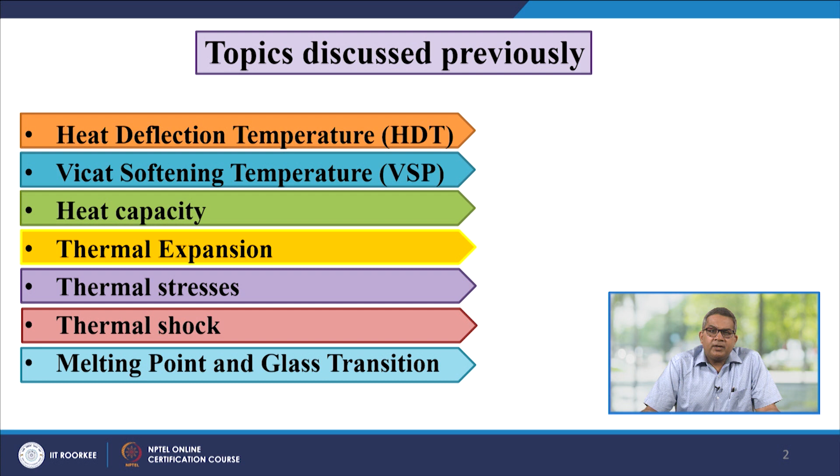In this segment we are going to discuss the melting temperature and the glass transition temperature, which is very important in polymeric systems. We will also discuss thermal conductivity, especially in polymers and composites. Apart from this, we will discuss heat transfer and heat conduction, how this conduction takes place in polymeric systems, and we will deal with several heat transfer examples pertaining to polymers.

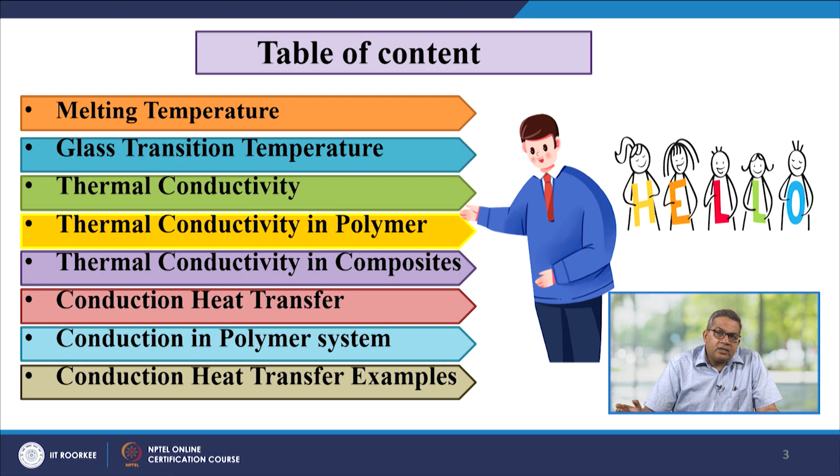Now let us talk about amorphous and crystalline polymers. Polymers are usually made up of long chain molecules, which may be amorphous or crystalline. The structure of a polymer is defined in terms of crystallinity.

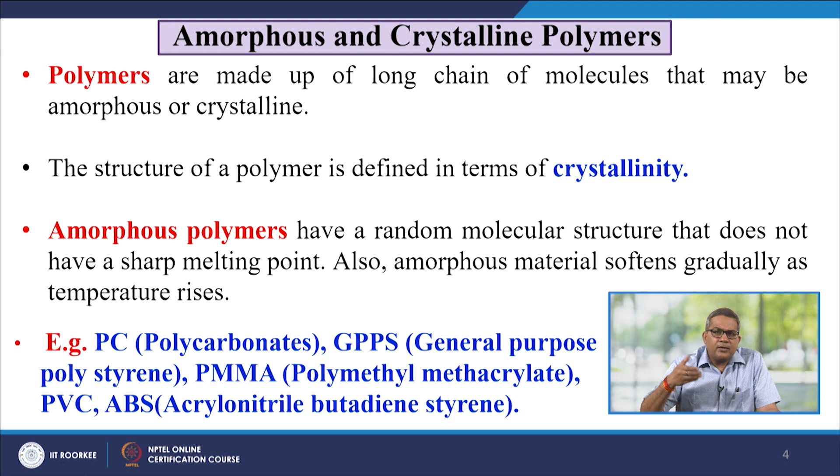Amorphous polymers have a random molecular structure that does not have a sharp melting point. Also, amorphous materials soften gradually as the temperature rises. For example, polycarbonate, general purpose polystyrene, polymethyl methacrylate, and acrylonitrile butadiene styrene are the best examples of these polymers.

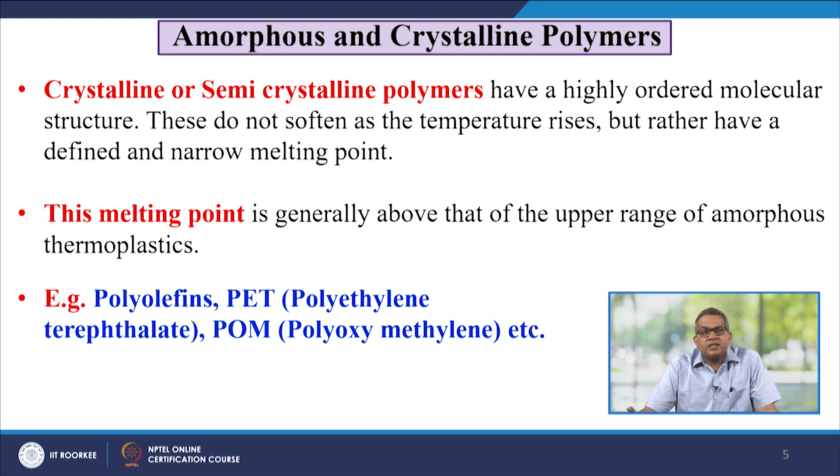Now, crystalline or semi-crystalline polymers have a highly ordered molecular structure. These do not soften as the temperature rises, but rather have a defined and narrow melting point, which is generally above the upper range of amorphous thermoplastics. For example, polyolefins, polyethylene terephthalate, and polyoxymethylene are examples of crystalline and semi-crystalline polymers.

Completely amorphous polymers possess only the glass transition temperature, completely crystalline polymers possess only the crystalline melting point, and semi-crystalline polymers possess both the glass transition temperature and the melting temperature.

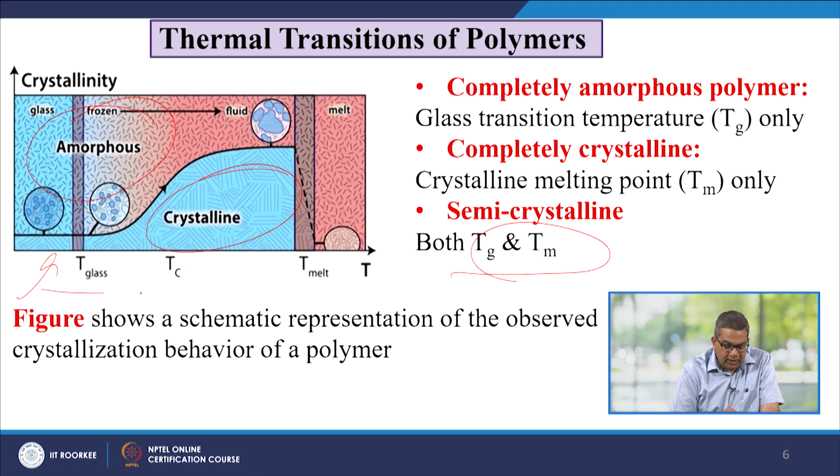In this figure you see the schematic representation of the observed crystallization behavior of a polymer. Here you see the amorphous range and the crystalline range, and if you change the temperature, you will observe this type of behavior.

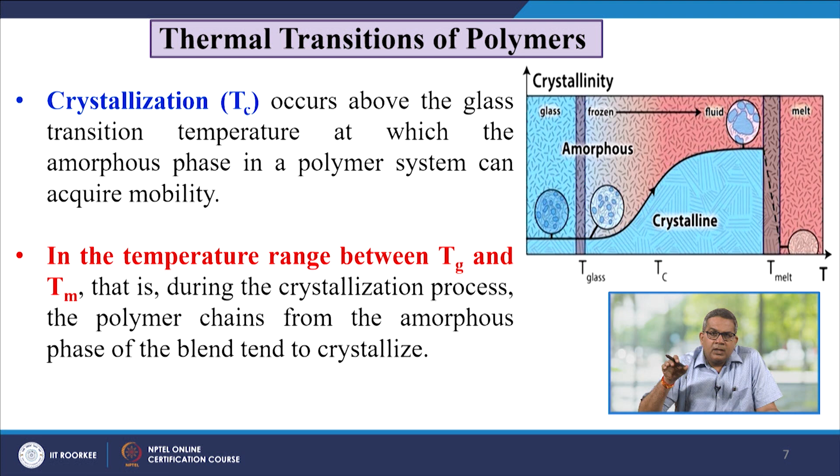Now, crystallization TC occurs above the glass transition temperature, at which the amorphous phase in the polymer system can acquire mobility. In the temperature range between the glass transition temperature and the melting temperature, that is during the crystallization process, the polymer chains from the amorphous phase of the blend tend to crystallize.

Let us talk about the glass transition temperature, since in the previous slides we discussed this TG. When an amorphous polymer is heated, the temperature at which the polymer structure turns to a viscous liquid or rubbery state is called the glass transition temperature, TG. This is because the polymeric chains try to unentangle themselves and align in a particular flow behavior, which occurs at the glass transition temperature.

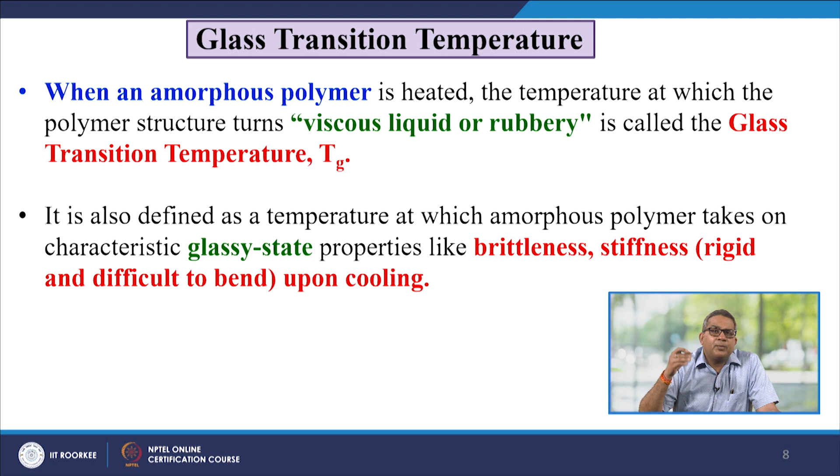It is also defined as the temperature at which the amorphous polymer takes on characteristic glassy state properties like brittleness, stiffness, rigidity, and difficulty to bend, upon cooling. It is named 'glass' because glass is a supercooled liquid, and this resembles the amorphous polymeric structure.

This temperature is usually measured in degrees Celsius. It depends on the chemical structure of the polymer and the chain structure, and can therefore be used to identify polymers; it is directly related to the molecular weight distribution. So the value of the glass transition depends on the mobility of the polymeric chain.

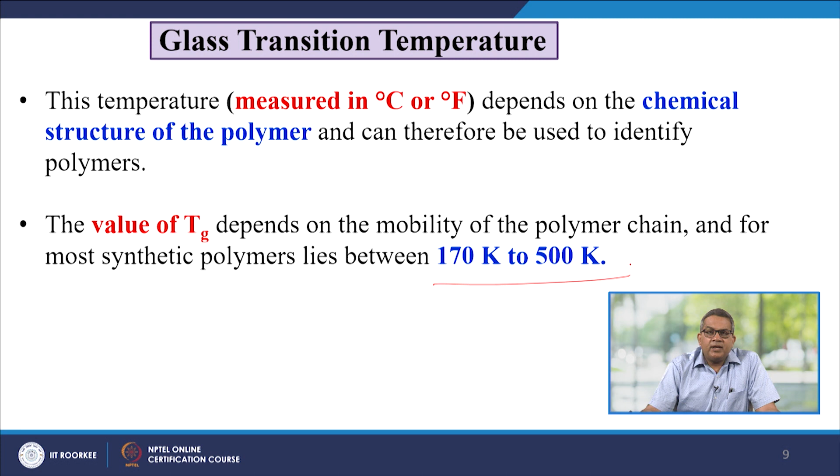As I discussed, when you raise the temperature, the chains try to unentangle, and if you lower the temperature, they try to entangle themselves. For most synthetic polymers, this lies between 170 Kelvin to 500 Kelvin.

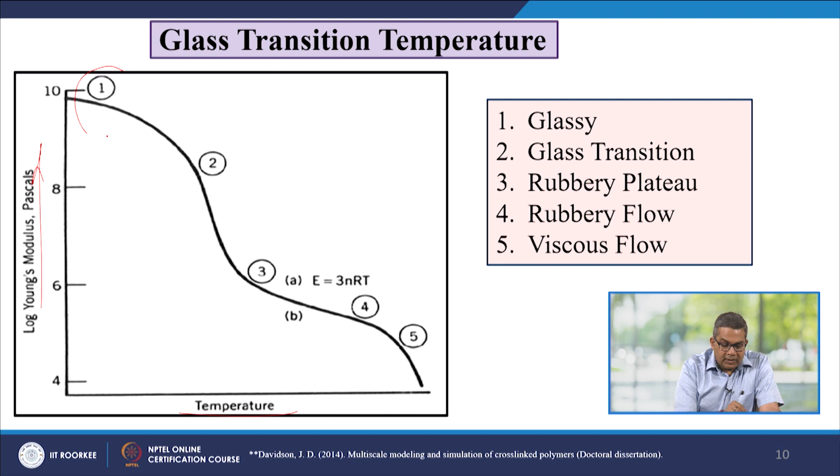Now here you see the Young's modulus versus temperature plot. Here you see the glass transition temperature variation for different stages: the glass transition temperature, and over the period of raising the temperature, the rubbery state, rubbery flow, and then the viscous flow. This is because if you raise the temperature, all the chains try to align themselves in a particular array and then try to flow.

So these are the different stages observed if you raise the temperature from any stipulated point to a different point.

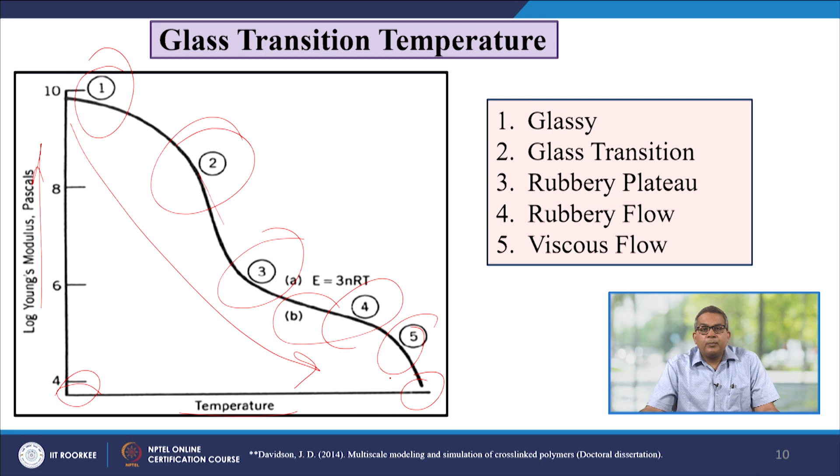The transition from glass to the rubber-like state is an important feature of polymeric behavior, as there is a dramatic change in physical properties such as hardness and elasticity. Some polymers are used below their glass transition temperature, like polystyrene and PMMA, which are hard and brittle, and their glass transition temperature is higher than room temperature.

If you raise the temperature, initially this is the glassy state, which is a subcooled liquid type of state. Then at the glass transition temperature they align in the rubbery state, and then they try to go for the viscous flow.

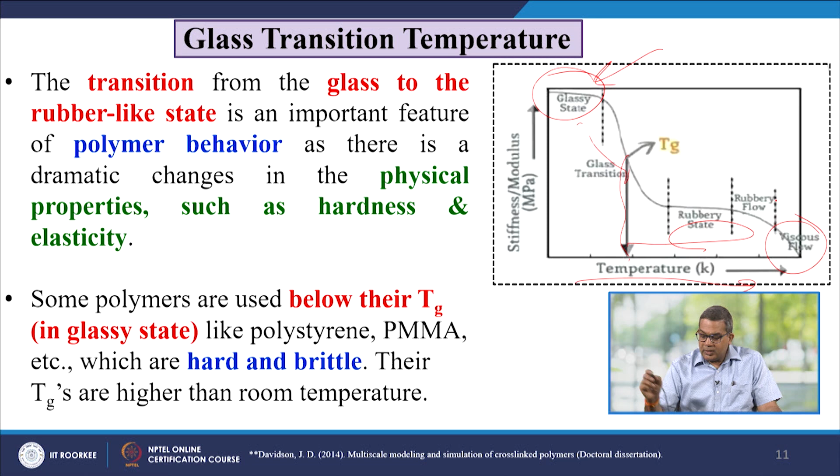Some polymers are used above their glass transition temperature, like rubber elastomers, polyisoprene, polyisobutylene, etc., which are soft and flexible in nature and their Tg is less than room temperature. So this can be used as a soft material for various purposes, like different types of artificial grasses, carpets, and all these things use this particular behavior.

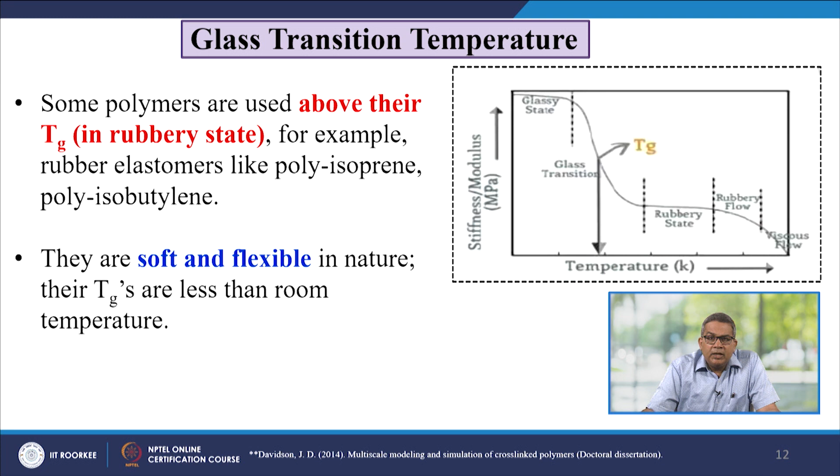At the glass transition temperature, changes in hardness, volume, and percent elongation to break of the solid are mainly seen, and glass transition is an important tool to modify the physical properties of the polymer molecules.

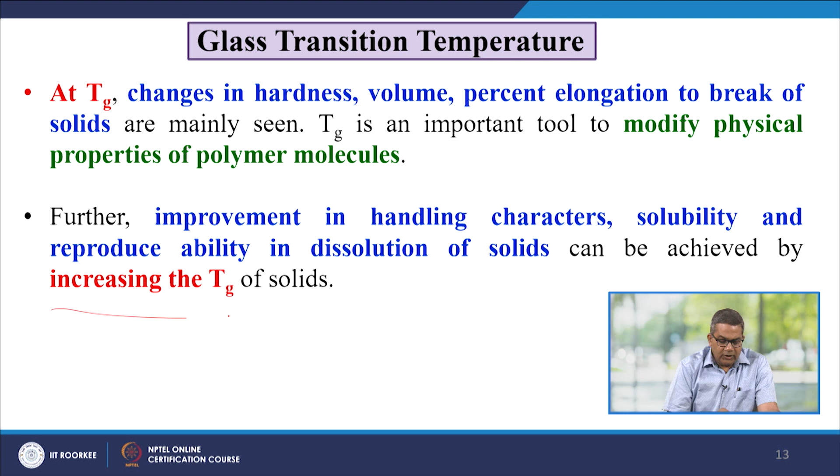Further improvement in handling characteristics, solubility, and reproducibility in the dissolution of the solid can be achieved with an increase in the glass transition of the solids.

Sometimes hard plastics like polystyrene and polymethyl methacrylate are used below their glass transition temperature when they are in the glassy state. Their glass transition temperature values are above room temperature, around 100 degrees Celsius.

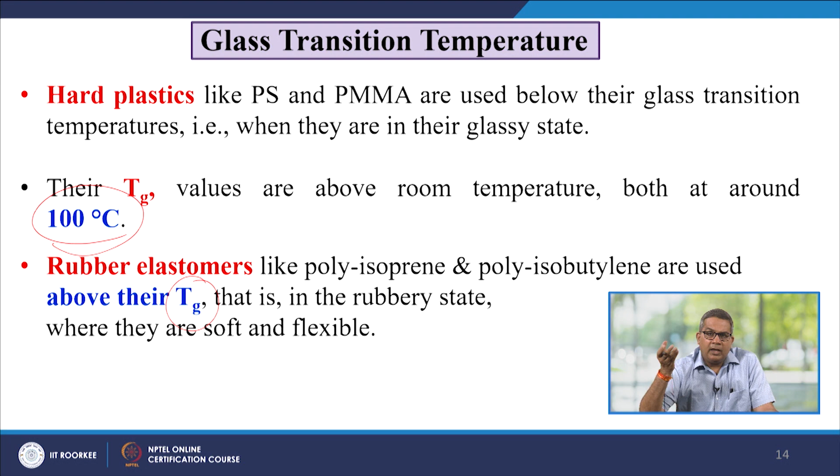Rubbery elastomers like polyisoprene and polyisobutylene are used above their glass transition temperature, as their rubbery state is required, or the soft and flexible character is required for those polymers.

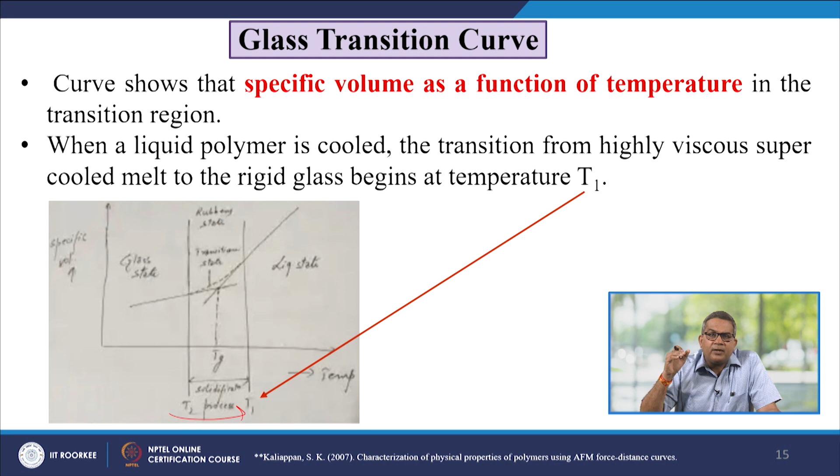Here you see the curve of specific volume versus temperature in the transition region. When a liquid polymer is cooled, the transition from a highly viscous supercooled melt to the rigid glass begins at temperature T1. This is T2, where the solidification process is terminated.

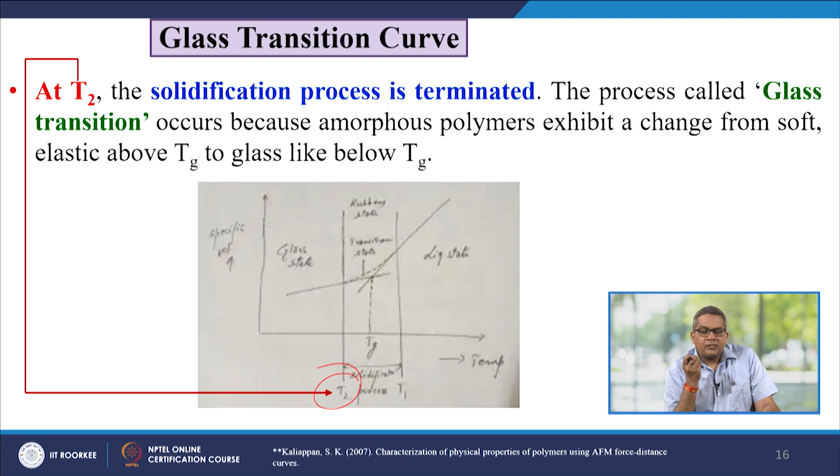This process is called glass transition, and it occurs because the amorphous polymer exhibits a change from soft elastic above the glass transition to glass-like below the glass transition temperature. So the motion of all the polymeric chains starts to cease.

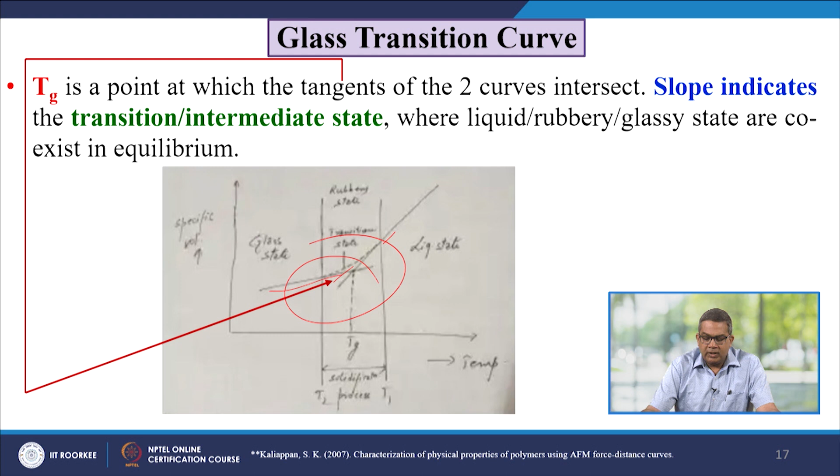The glass transition temperature, or Tg, is the point at which the tangents of the two curves intersect, and the slope indicates the transition or intermediate state where the liquid, rubbery, and glassy states coexist in equilibrium.

How do we measure the glass transition temperature? By observing the variation of some thermodynamic properties with temperature, like specific volume. If we plot specific volume versus temperature, the slope of the curve increases above the glass transition temperature.

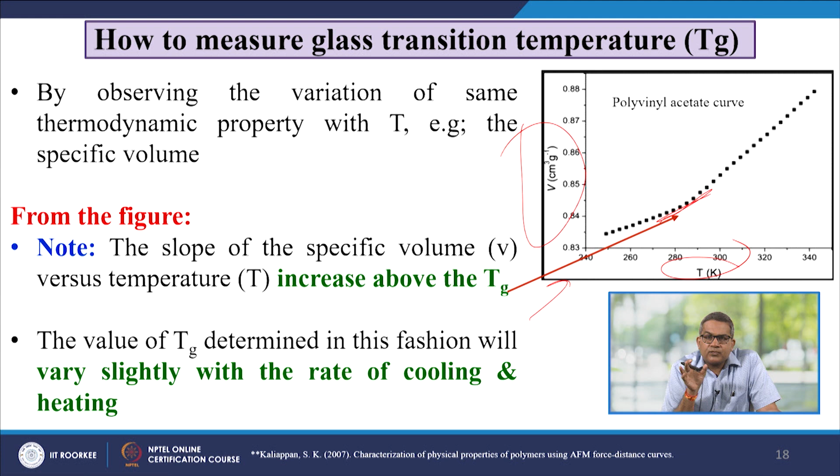The value of Tg determined in this fashion will vary slightly with the rate of cooling and heating. This reflects the fact that long entangled polymer chains cannot respond instantaneously to changes in temperature and elasticity, because they are bulky in nature, and there is difficulty in making thermodynamic measurements on the polymer.

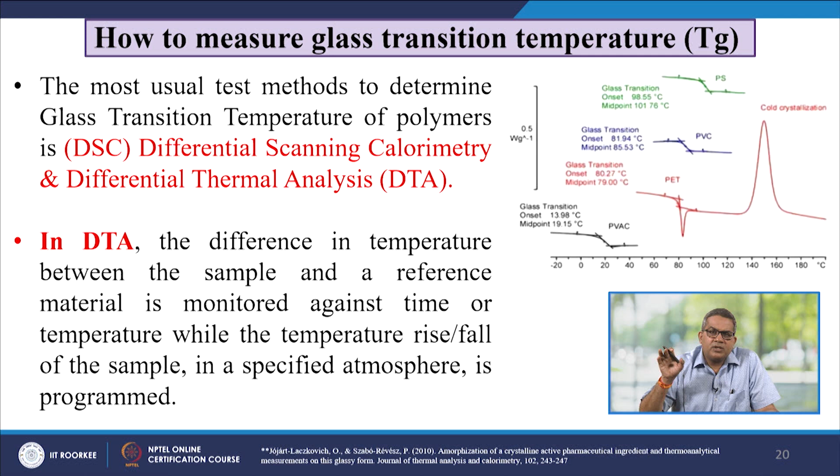The most usual test method to determine the glass transition temperature of a polymer is DSC, differential scanning calorimetry, and DTA, differential thermal analysis. In DTA, the difference in temperature between the sample and a reference material is monitored against time or temperature, while the temperature rise or fall of the sample in a specified atmosphere is programmed.

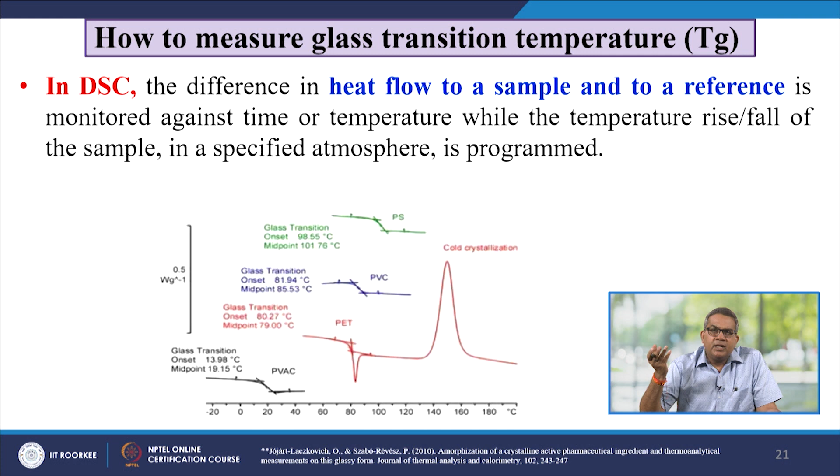In DSC, the difference in heat flow to a sample and to a reference is monitored against time or temperature, while the rise or fall of the temperature in a specified atmosphere is programmed.

Let us talk about the DSC, that is differential scanning calorimetry. DSC measures the heat flow into or from a sample as it is heated, cooled, or held under isothermal condition. There are various applications of DSC.

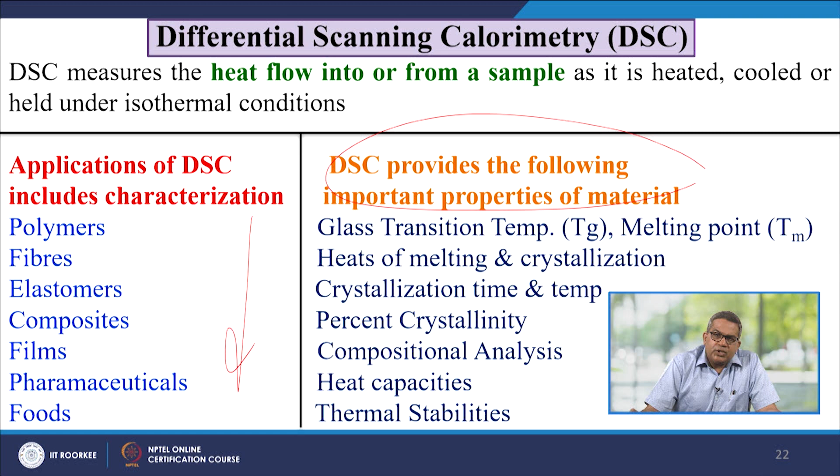This includes polymers, fibers, elastomers, composites, film, pharmaceuticals, food, etc. This DSC provides different important properties of the material like glass transition temperature, melting point, heats of melting and crystallization, crystallization time and temperature, percent crystallinity, compositional analysis, heat capacities, thermal stabilities, all those things.

Now there are various terminologies used in DSC. The first order transition: in the first order transition there is a transfer of heat between the system and surrounding, and the system undergoes an abrupt volume change, that is melting point and crystallization temperature. So here you see this is the temperature, the crystalline solid melt, and this is the crystalline first order.

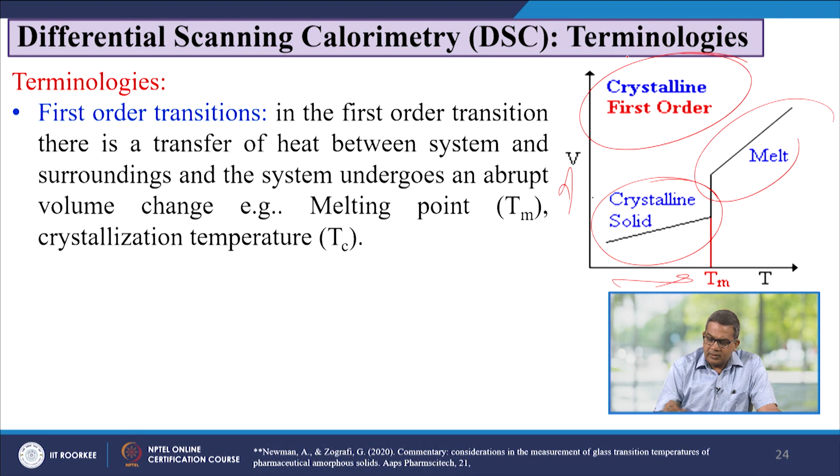Now, second order transition: in the second order transition there is no transfer of heat, but the heat capacity does change. The volume changes to accommodate the increased motion of the polymer chain, but it does not change discontinuously.

Now, when we plot the glass transition temperature, the Tg, in a graph, this provides the property of the amorphous region. Below glass transition temperature, disordered amorphous solid with immobile molecules, and above glass transition temperature, the disordered amorphous solid in which the portion of molecules can move back and forth.

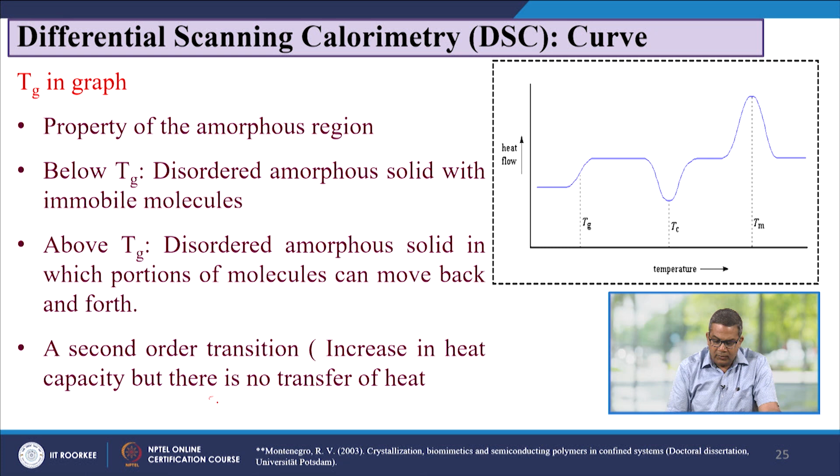The second order transition shows increase in heat capacity, but there is no transfer of heat. Above glass transition temperature, the polymers are in mobile condition. When they reach the right temperature, they gain enough energy to move into a very ordered arrangement, which we call the crystals. When polymer falls into this crystalline arrangement, they give off heat.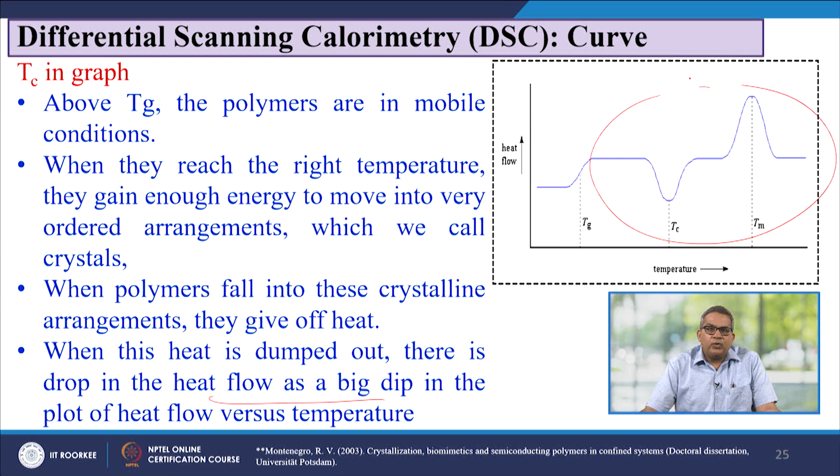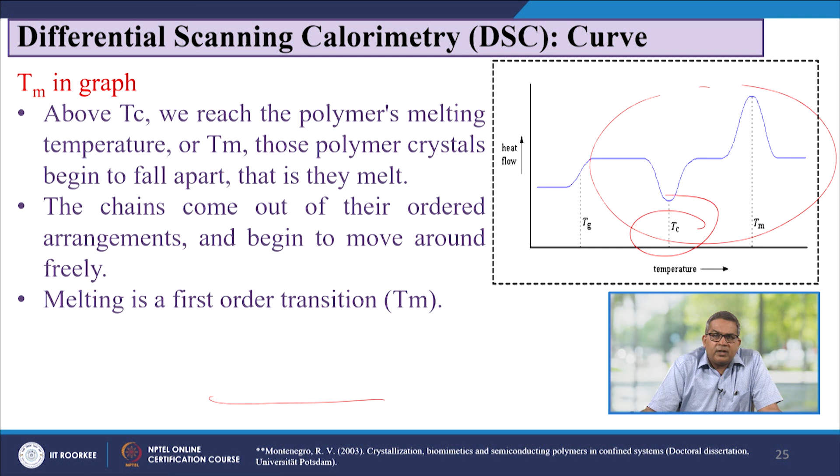When this heat is dumped off, there is a drop in the heat flow, a big dip in the plot of heat flow versus temperature. So above Tc, or if we talk about the melting temperature, above Tc we reach the polymer's melting temperature, or Tm, those polymer crystals begin to fall apart, that is they melt. So melting temperature is quite essential, the chains come out of their ordered arrangement and begin to move around freely, and melting is a first order transition.

Now here you see this is a table which represents the difference in TGA, DTA and DSC. Now TGA is thermal gravimetric analysis, DTA is differential thermal analysis, and DSC is differential scanning calorimetry.

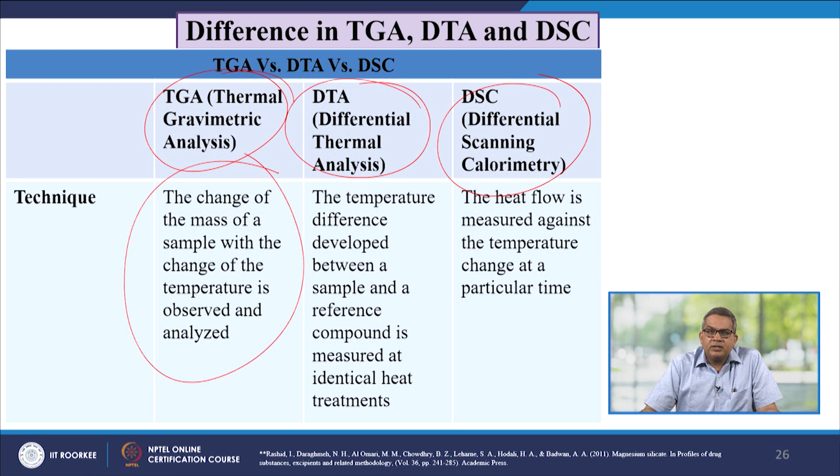This TGA utilizes the technique of the change of mass of a sample with the change of temperature, usually observed and analyzed. Whereas in DTA, the temperature difference developed between a sample and a reference compound is measured, and identical heat treatment is carried out. The DSC, the heat flow is measured against the temperature change at a particular time.

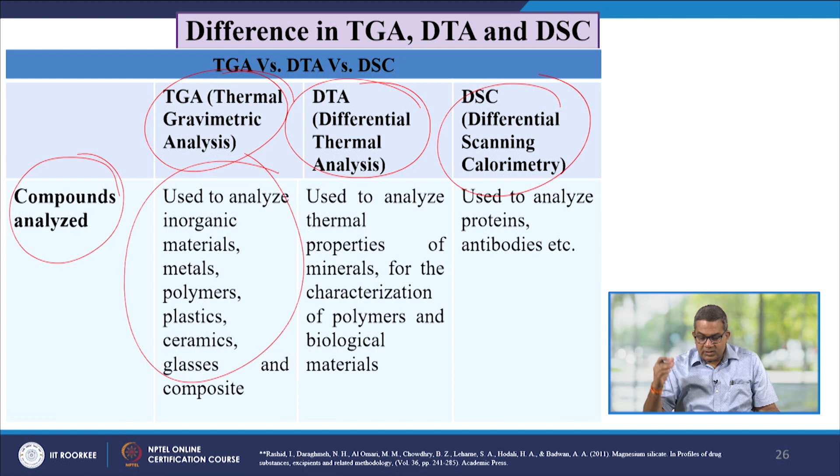Then the compound analyzed - what compound do we analyze? This is used to analyze inorganic material, metals, polymers, plastics, ceramics, glass, composites, etc. And in DTA, they used to analyze the thermal properties of minerals for the characterization of polymer and biological materials. And DSC, they used to analyze the protein, antibodies, etc.

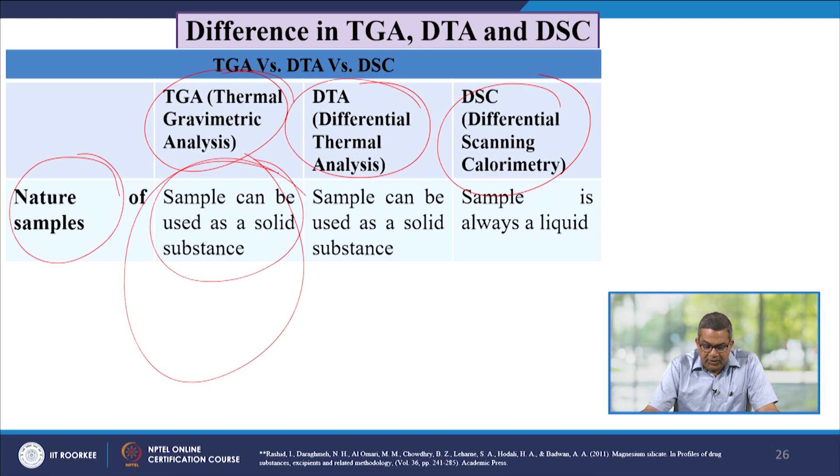Now, nature of sample is again very important. The sample can be used as a solid substance in TGA, whereas the solid substance again can be used in DTA, and in DSC the sample is always in liquid form.

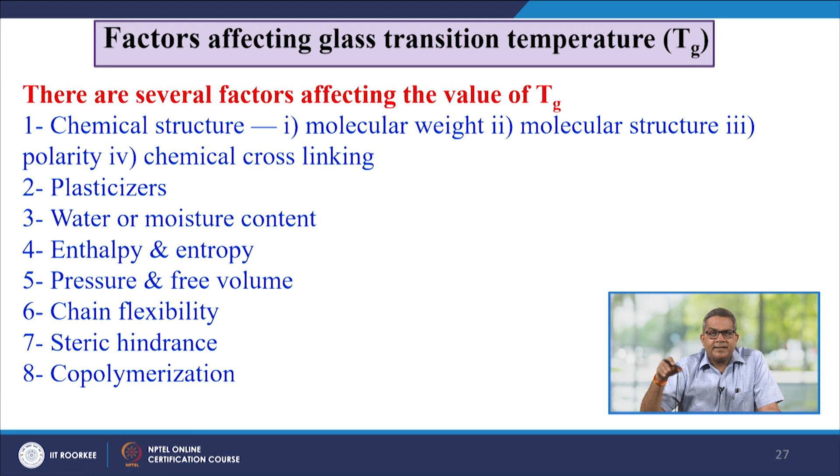Now, let us talk about the various factors affecting the glass transition temperature, like chemical structure, molecular weight, molecular structure, polarity, chemical cross-linking. Apart from this, the plasticizer, water or moisture content, enthalpy and entropy of individual polymers, pressure and free volume, chain flexibility, steric hindrance, copolymerization - all these factors affect the glass transition temperature.

Let us talk about the chemical structure. The molecular weight is directly proportional to the glass transition temperature. So the increase in molecular weight, say up to 20,000, value of Tg also increases, but after this particular triggering value, Tg is unaffected because Tg reaches a limiting value.

There is a relationship between the glass transition temperature and the molecular weight. This is given by P.J. Flory. Now here, Tg is equal to Tg infinite minus k over m.

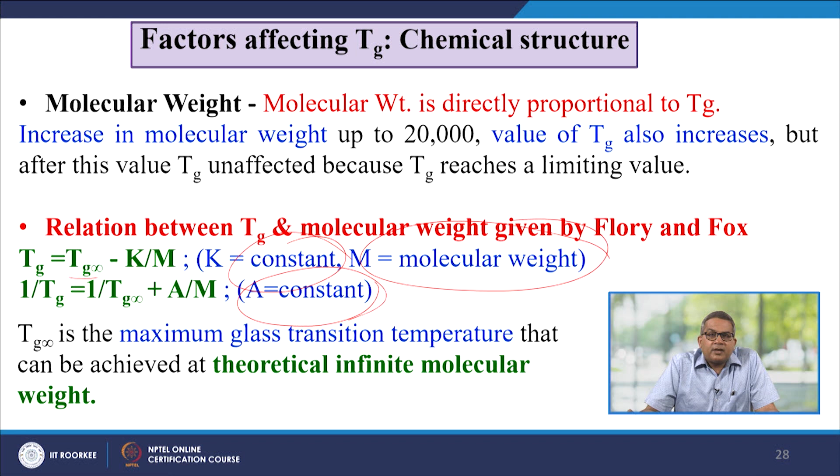K is a constant and M is the molecular weight. 1 over Tg is equal to 1 over Tg infinite plus a over M, where a is a constant. Tg infinite is the maximum glass transition temperature that can be achieved at a theoretical infinite molecular weight.

Then the molecular structure: insertion of bulky inflexible side groups increases the glass transition temperature of the material due to the decrease in mobility of those chains.

Then chemical cross-linking. Increase in cross-linking decreases the mobility. This leads to a decrease in free volume and an increase in glass transition temperature.

Some polar groups. The presence of polar groups increases the intermolecular forces, interchain interaction, and cohesion, leading to a decrease in free volume and resulting in an increase in glass transition temperature.

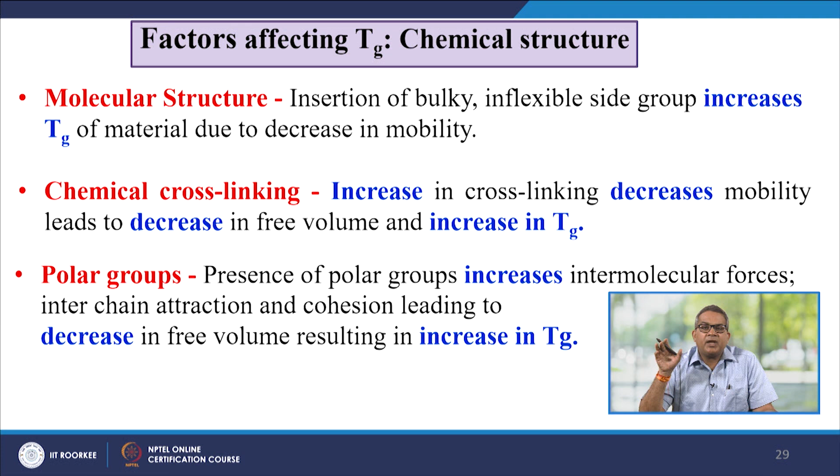Sometimes addition of plasticizer plays a very vital role. Plasticizers are low molecular weight, non-volatile substances like dibutyl phthalate, dioctyl sebacate, methyl salicylate, and methyl acetate.

Addition of plasticizer increases the free volume in the polymer structure, and this plasticizer gets in between the polymer chains and moves them apart from each other.

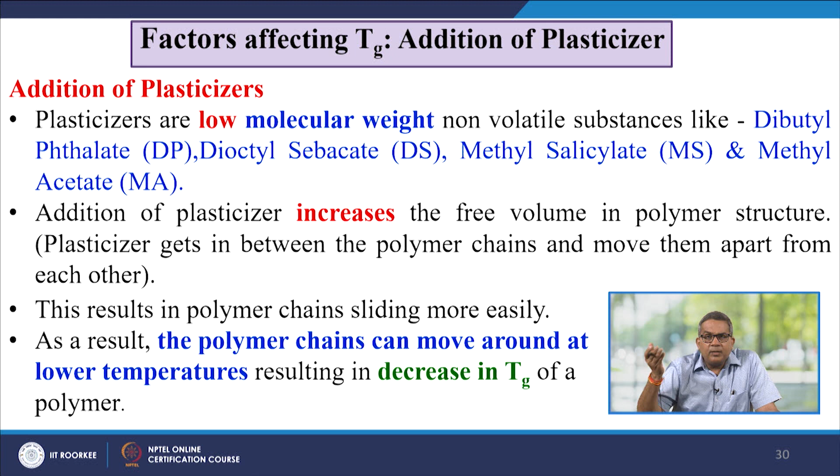This results in the polymer chains sliding more easily. As a result, the polymer chains can move around at a lower temperature, resulting in a decrease in Tg of the polymer.

Water content and entropy also play valuable factors in affecting the Tg. Increase in moisture content helps in the formation of hydrogen bonds that increase the distance between polymer chains, hence increasing free volume and decreasing the glass transition temperature.

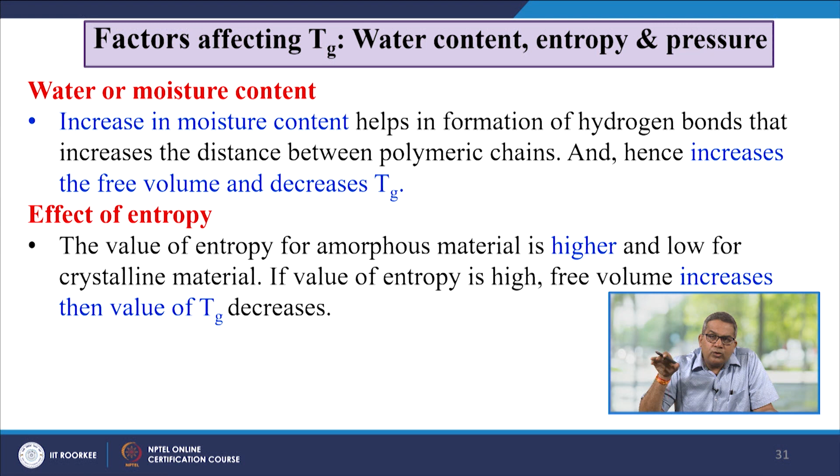Effect of entropy: the value of entropy for amorphous material is higher and low for crystalline material. If the value of entropy is high, the free volume increases and the value of Tg decreases.

Pressure and free volume also play a vital role. Increase in surrounding pressure leads to a decrease in free volume and ultimately a higher glass transition temperature.

Chain flexibility: a polymer with a linear chain, mainly consisting of C-C, C-O, or C-N bonds, possesses high chain flexibility and therefore shows a low Tg value, usually minus 125 degrees Celsius for polyethylene, for the sake of an example.

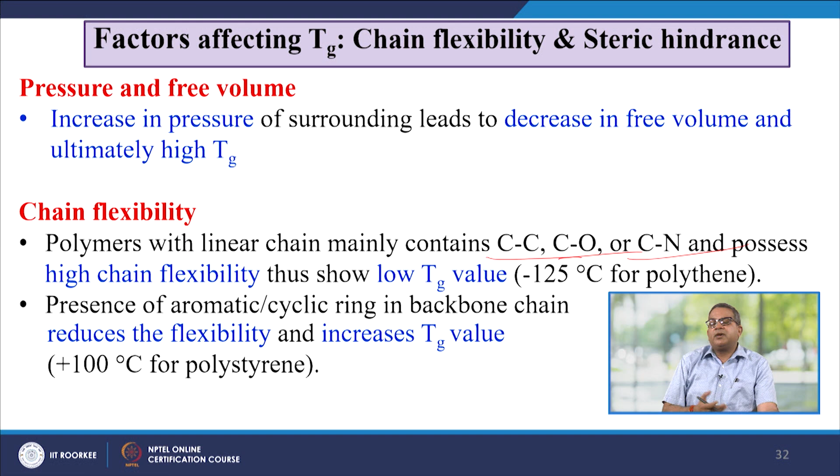The presence of an aromatic ring in the backbone chain reduces the flexibility, thereby increasing the glass transition temperature.

Sometimes steric hindrance also plays a very vital role. The presence of larger and bulky groups on the polymeric long chain restricts the degree of freedom and free rotation, hence the Tg value increases. The ortho position restricts rotation due to steric hindrance more than the para and meta positions, therefore the Tg value is higher.

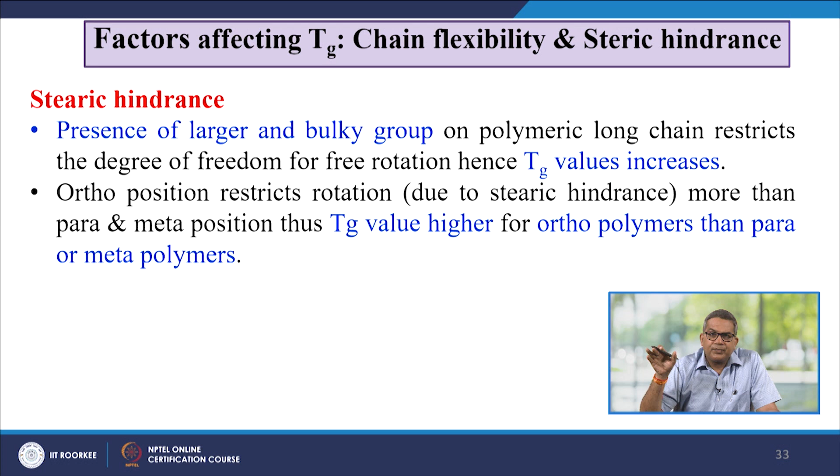Let us talk about the melting temperature: the temperature at which molecules transition from a rubbery state to a melt state, usually called the melt temperature or Tm. This melting temperature is the temperature at which the phase transition occurs.

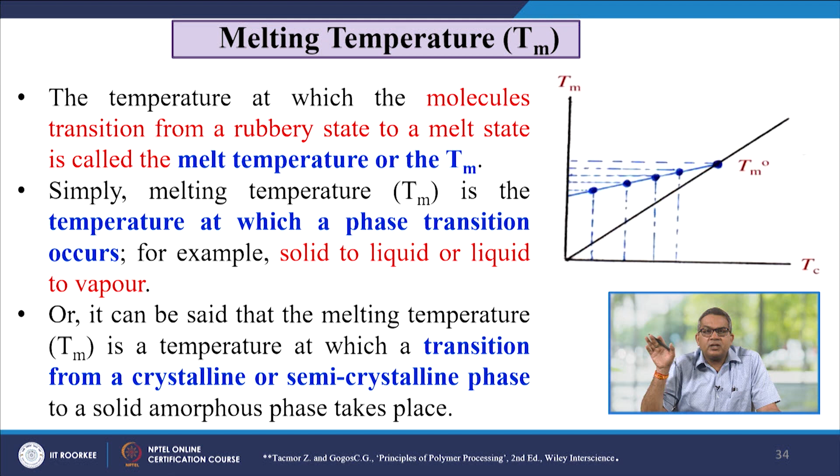For example, solid to liquid or liquid to vapor, or it can be said that the melting temperature Tm - the temperature at which transition from the crystalline or semi-crystalline phase to a solid amorphous phase takes place.

No melting temperature is observed for amorphous polymers, but there is an increase in slope at the glass transition temperature. For semi-crystalline polymer, which is intermediate to crystalline or amorphous, this shows both a melting temperature and a glass transition temperature.

So there is a relationship between the glass transition temperature and the melting temperature. For symmetrical polymers, Tg is equal to Tm over 2, and for non-symmetrical polymers, Tg is equal to 2Tm over 3.

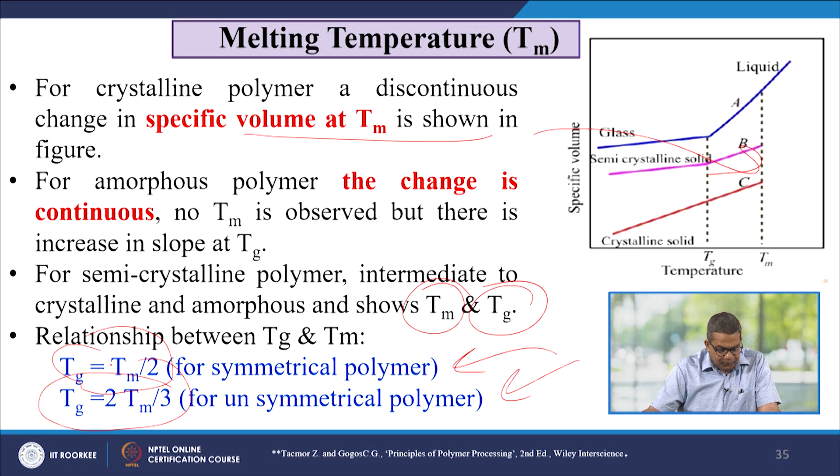Now there are various factors affecting the melting temperature, usually the same factors that affect the glass transition temperature and the melting temperature. Usually high glass transition temperature and high melting temperature are found together, and vice versa.

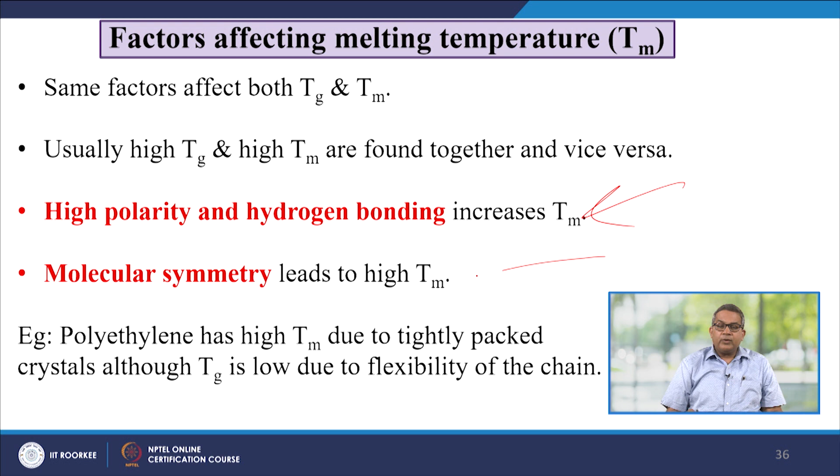High polarity and hydrogen bonding increase the melting temperature. Molecular symmetry also leads to a high melting temperature.

Let us talk about the thermal conductivity, K or lambda, the rate at which heat is transferred by conduction through a unit cross-sectional area of a material when a temperature gradient exists perpendicular to the area.

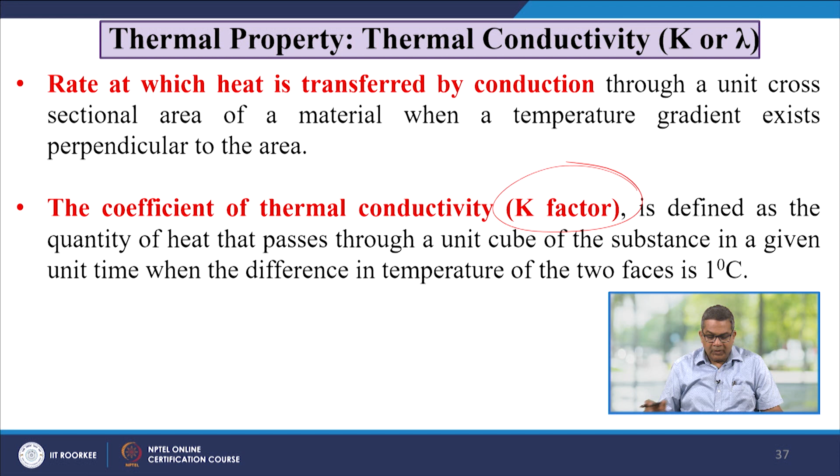The coefficient of thermal conductivity, the K factor, is usually defined as the quantity of heat that passes through a unit cube of substance in a given unit time when the difference in temperature of two faces is 1 degree Celsius. This is the mathematical representation of thermal conductivity K, where Q is the amount of heat passing, A is the cross-sectional area, delta T is the temperature difference, and T is the thickness of the specimen, usually represented as K.

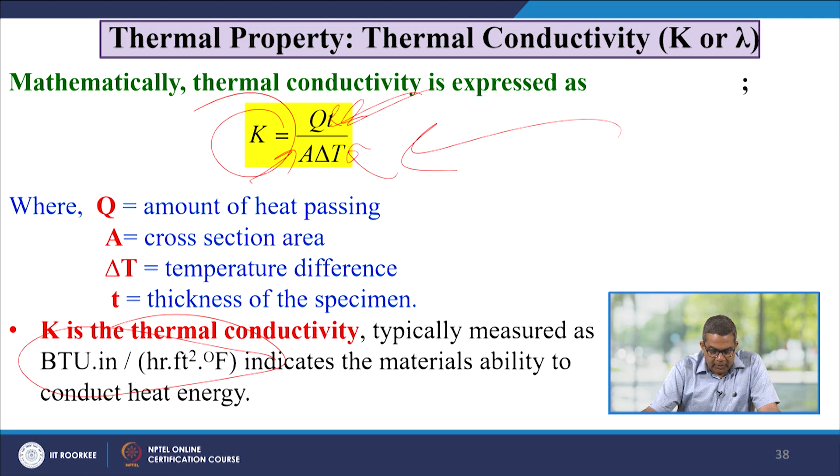This is measured in BTU inch per hour square feet degree Fahrenheit. This indicates the material's ability to conduct heat energy.

The significance of thermal conductivity is particularly important in applications such as headlight housing, pot handles, and hair curlers that require thermal insulation and heat dissipation properties.

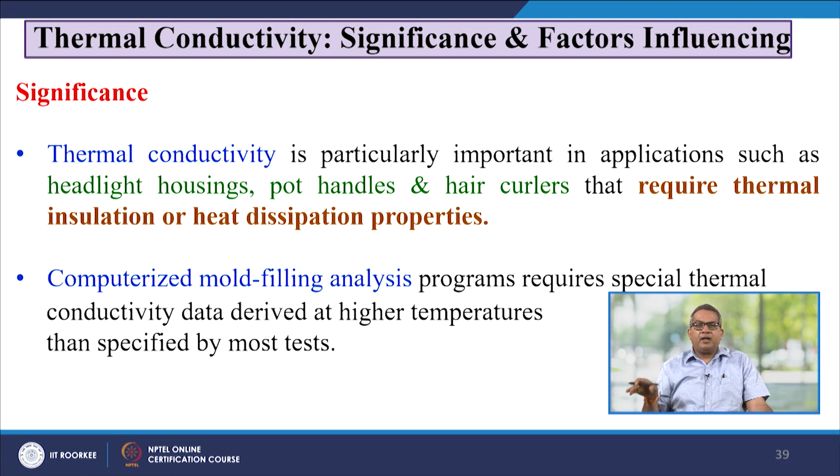Computerized mold filling analysis programs require special thermal conductivity data derived at higher temperature than specified by most tests. There are various factors affecting thermal conductivity.

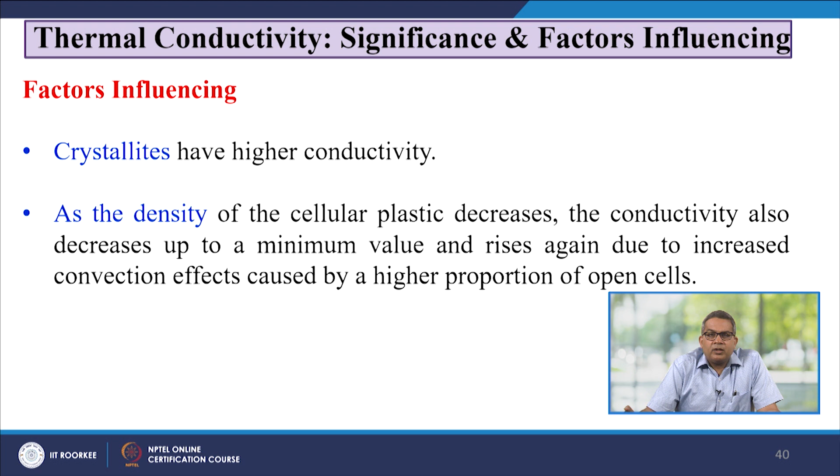One factor is the crystallites, which have higher thermal conductivity. As the density of cellular plastic decreases, the conductivity also decreases up to a minimum value and rises again due to the increased convection effect caused by the higher proportion of open cells.

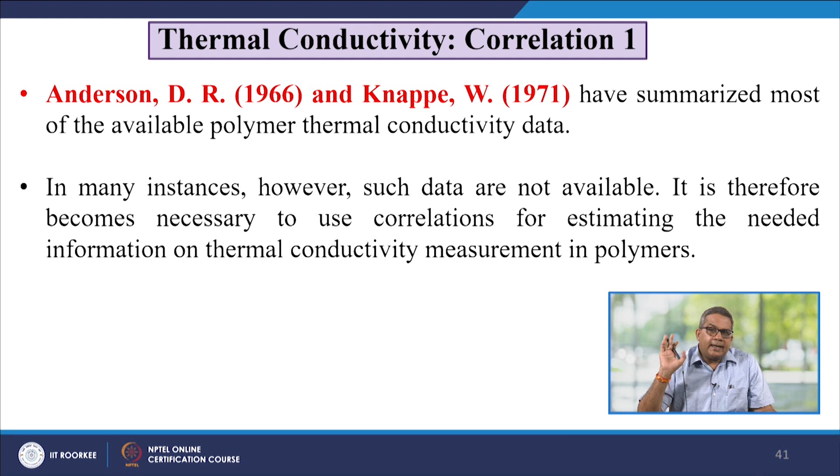Now let us talk about the correlations. Anderson and Knappe have summarized most of the available polymer thermal conductivity data. In many instances, such data are not available, so it becomes necessary to use certain correlations for estimating the needed information on thermal conductivity measurement in polymers.

This graph shows a relation between the thermal conductivity at any given temperature to the thermal conductivity at glass transition temperature, versus the ratio of given temperature to the glass transition temperature.

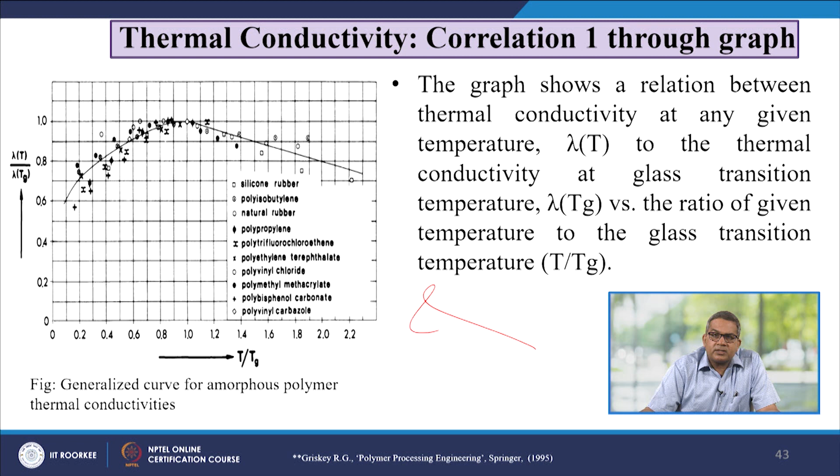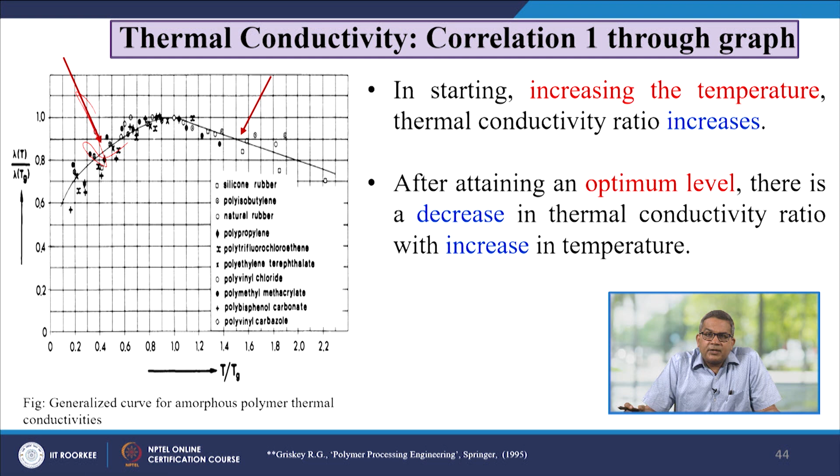At the start, as there is an increase in temperature, the thermal conductivity ratio increases, and after attaining the optimum level, there is a decrease in thermal conductivity ratio with increase in temperature.

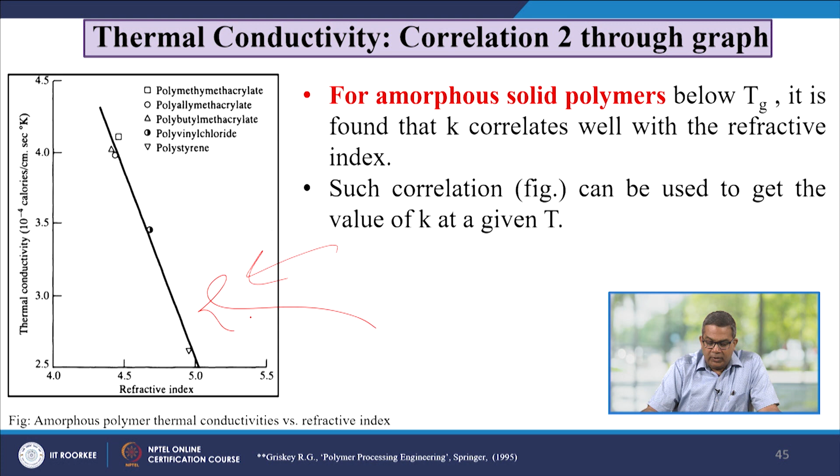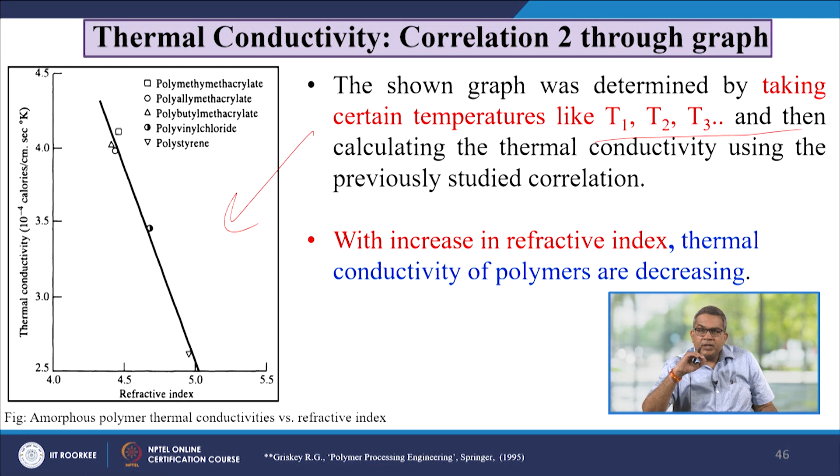This particular graph was determined by taking certain temperatures like T1, T2, T3 and so on, and then calculating the thermal conductivity using the previously studied correlation. So, with increase in the refractive index, thermal conductivity of the polymers decreases.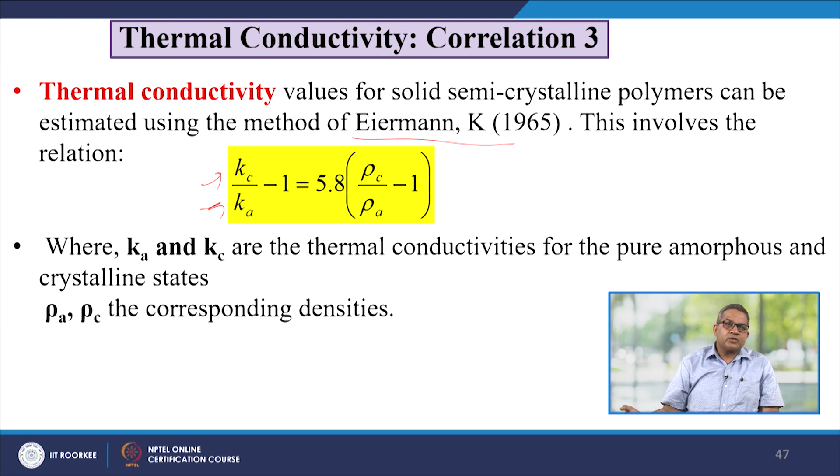Another correlation: the thermal conductivity values of solid semi-crystalline polymers can be estimated by the method of Eiermann. This involves the relation Kc over Ka minus 1 equals 5.8 into (rho C over rho A minus 1), where Ka and Kc are the thermal conductivities of the pure amorphous and crystalline states, used as reference materials, and rho A and rho C are the corresponding densities.

The previously studied correlation can be used in conjunction with this figure to estimate the thermal conductivity for a polymer of known crystallinity.

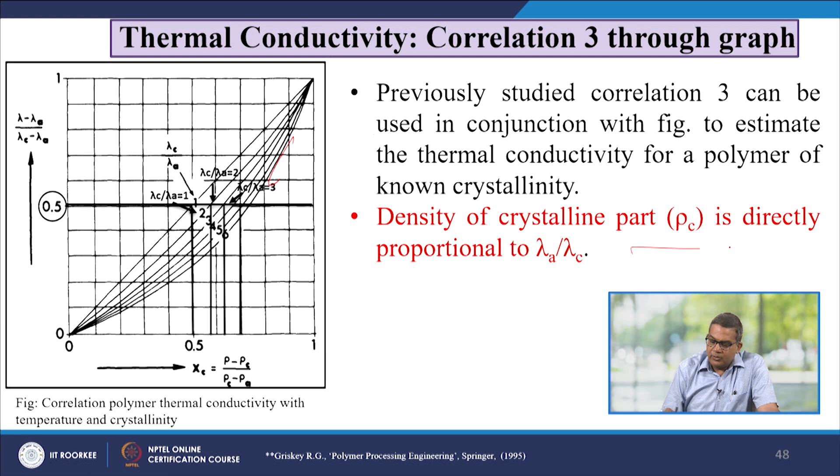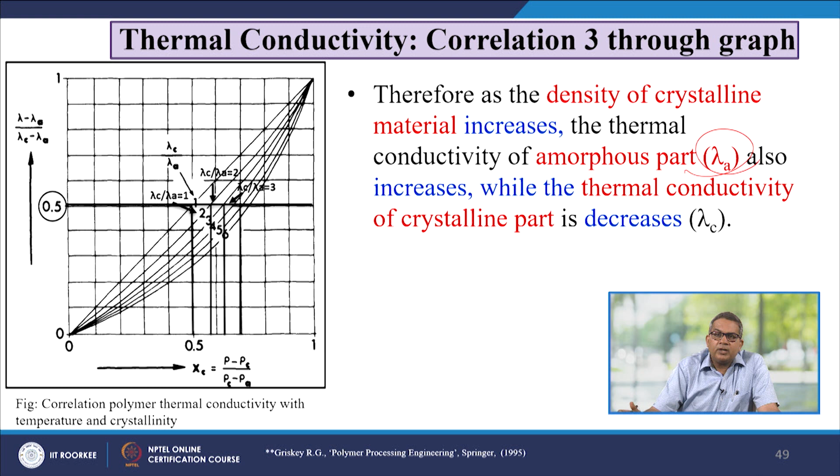Density of the crystalline part, rho C, is directly proportional to lambda A over lambda C. Therefore, as the density of the crystalline material increases, the thermal conductivity of the amorphous part lambda A also increases, while the thermal conductivity of the crystalline part, lambda C, decreases.

Another correlation concerns molten polymer thermal conductivities. This represents a somewhat different case than that of the solid phase. The thermal conductivities of melt polymers vary little with temperature.

Consequently, the acceptable value of K can be estimated from the relation: K is equal to 1.2 into 10 to the power minus 2, into Cp into rho to the power 1.33, into M to the power minus 0.3, over Tm to the power 0.216.

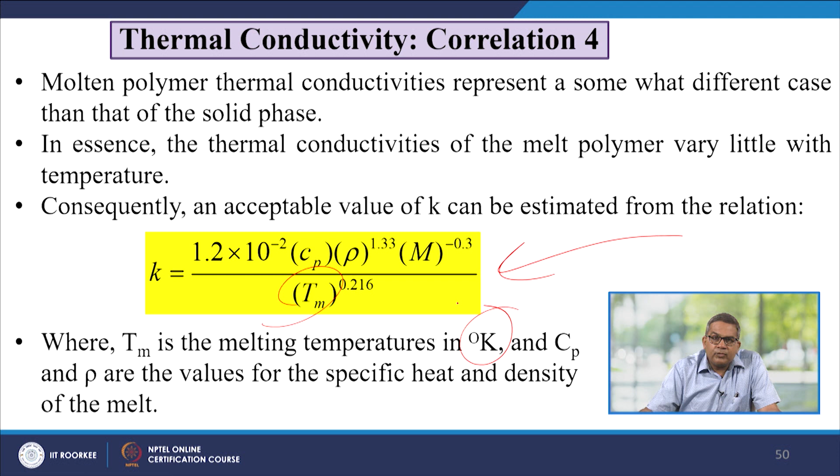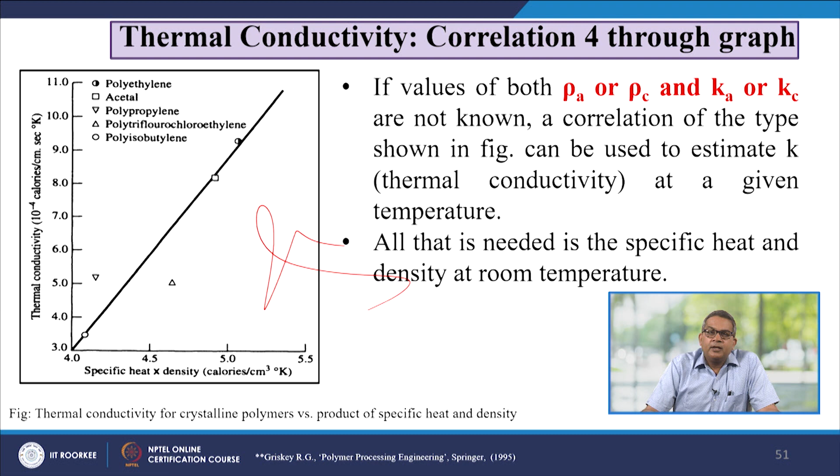This Tm is the melting temperature, in degrees Kelvin, and Cp and rho are the values of specific heat and density of the melt. If the values of both rho A and rho C, or Ka or Kc, are not known, a correlation of the type shown in this particular figure can be used to estimate K, the thermal conductivity, at a given temperature. All that is needed is specific heat and density at room temperature.

Correlation number 5, the effect of orientation of the solid and the resulting anisotropy, is given in the review paper by Anderson and Knappe. This usually utilizes the pressure effect, and the pressure effect generally can be handled as in this mathematical relation: dk over dp is equal to Khp times 5.25 beta, where beta is the isothermal compressibility and Khp is the high pressure value of thermal conductivity.

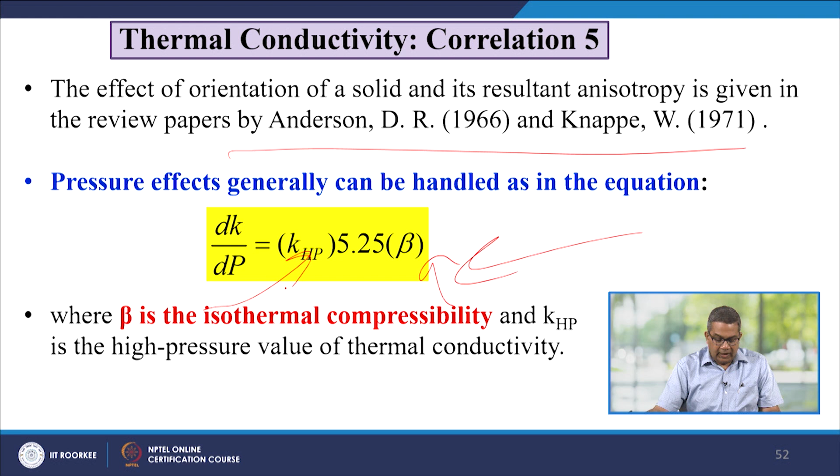Now, let us take some examples of thermal conductivity. Here is one question: it is given that the thermal conductivity for polymethyl methacrylate is 5.2 into 10 to the power minus 4 calorie per centimeter Kelvin at 25 degrees Celsius. So what will be its value at 200 degrees Celsius?

This obviously requires certain statistical data. At 25 degrees Celsius, T over Tg is equal to 0.77, and at 200 degrees Celsius, T over Tg is equal to 1.22. Now you can utilize this particular graph to find lambda T over lambda Tg.

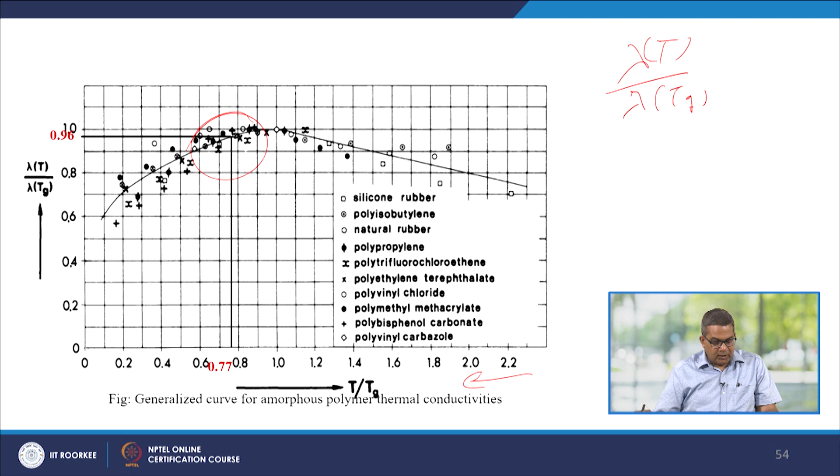As T over Tg is 0.77, to obtain the value of lambda T over lambda Tg, we should first go through the x-axis using a scale bar determining the value of 0.77 — for your convenience it is already marked in this figure. Then we trace the vertical line from this value to the point where the dark circle for polymethyl methacrylate is indicated, and then trace horizontally to obtain the desired value, which is determined as 0.96.

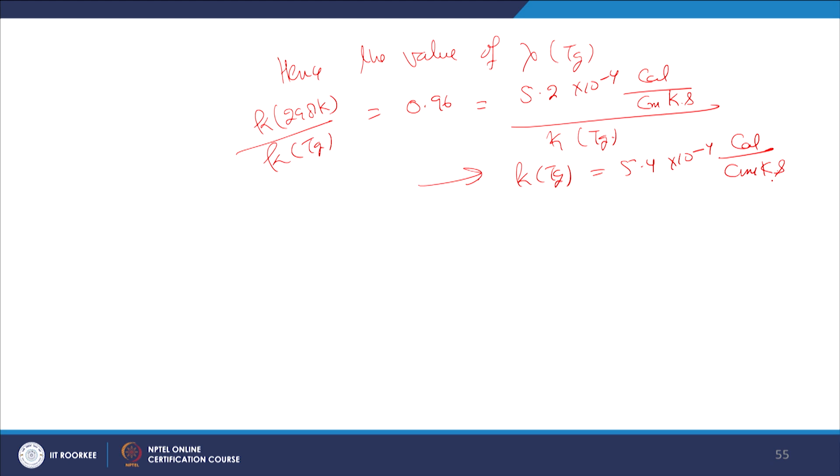Now, as we have obtained the value of thermal conductivity at the glass transition temperature, we can use this value to obtain the thermal conductivity of the material at any temperature, if the ratio between the temperature and the glass transition temperature is provided. Looking at the question data, at 200 degrees Celsius, T over Tg is given as 1.22, so we will again use the same graphical tracing strategy.

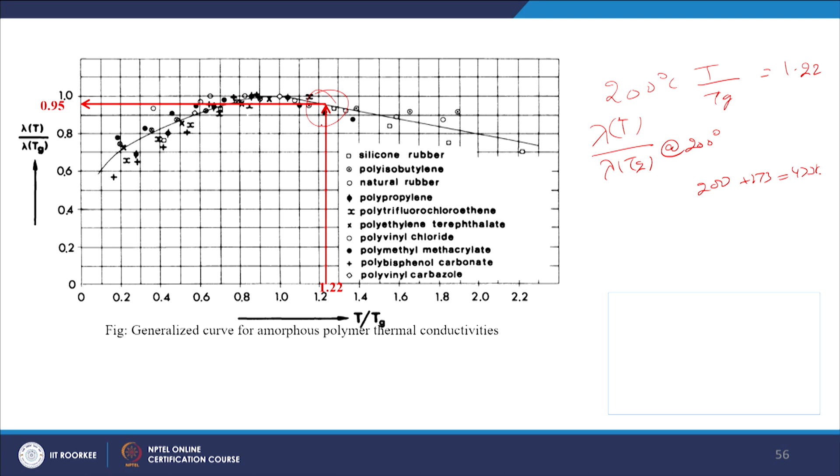We obtain the value of lambda T over lambda Tg at 200 degrees Celsius, that is 200 plus 273 equals 473 Kelvin. This value is given over here, and by this way you will find that this one is 0.95.

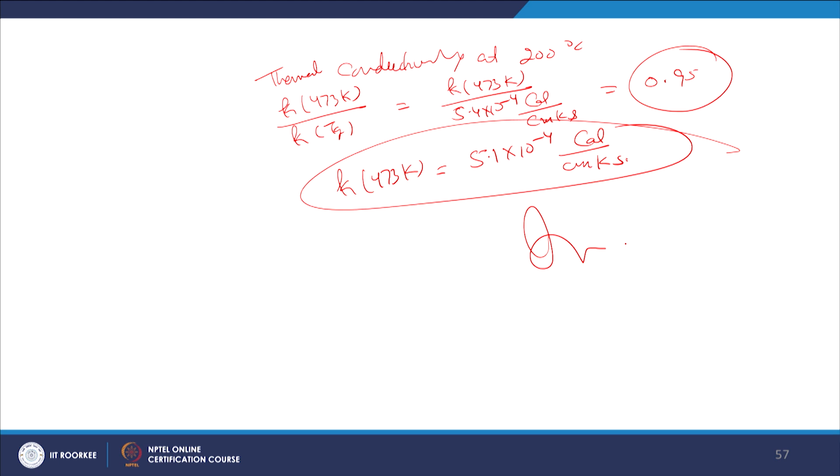Now, thermal conductivity at 200 degrees Celsius is given as K 473 Kelvin equal to 5.4 into 10 to the power minus 4, multiplied by 0.95 as calculated from the graph. So K equals 5.1 into 10 to the power minus 4. This is the answer.

Let us take another question. What is the thermal conductivity of polystyrene at 496 Kelvin? It is given that the molecular weight M is equal to 104.5 and the glass transition temperature is 373 Kelvin.

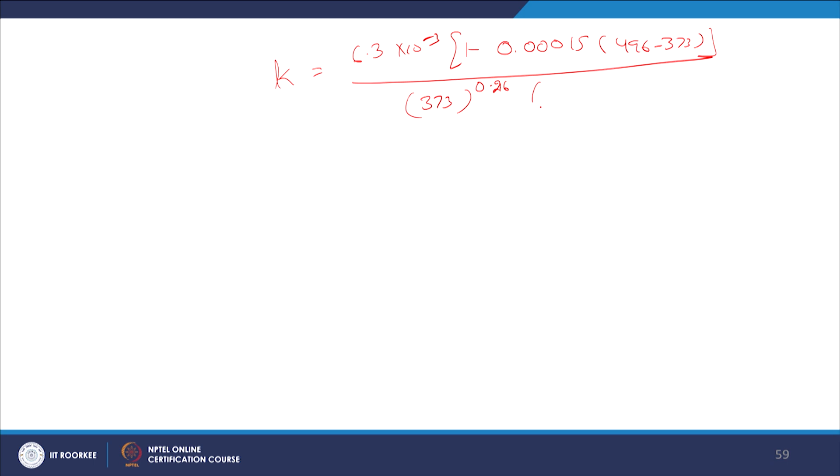Here you can use the formula already discussed: K is equal to 6.3 into 10 to the power minus 3, times 1 minus 0.00015 into (T minus Tg) over Tg, to the power 0.26, times m to the power minus 0.3. Just put in the values: 6.3 into 10 to the power minus 3 into 1 minus 0.00015 into (496 minus 373) over 373, to the power 0.26, into 104.5 to the power minus 0.3, which comes out to be 4.2 into 10 to the power minus 4 calories per centimeter Kelvin second, and this is our answer.

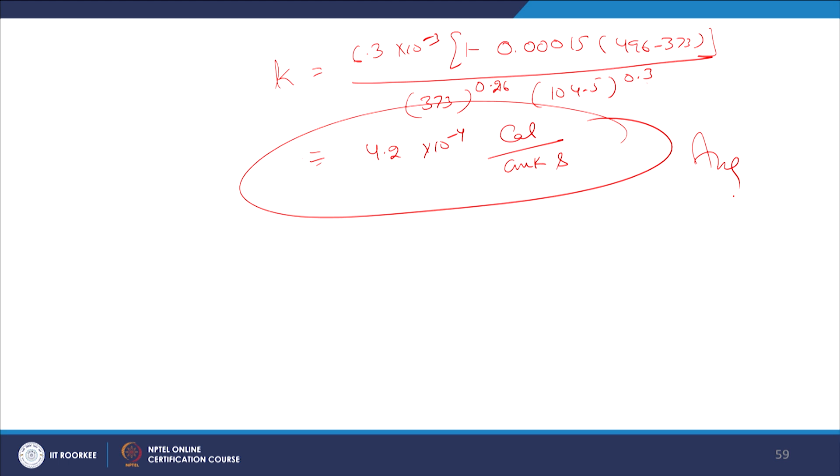So dear friends, in this particular segment we discussed various aspects of thermal conductivity with a couple of examples, and for your convenience we have enlisted various references. These references are very useful for further studies, so in case you wish, you can utilize them.